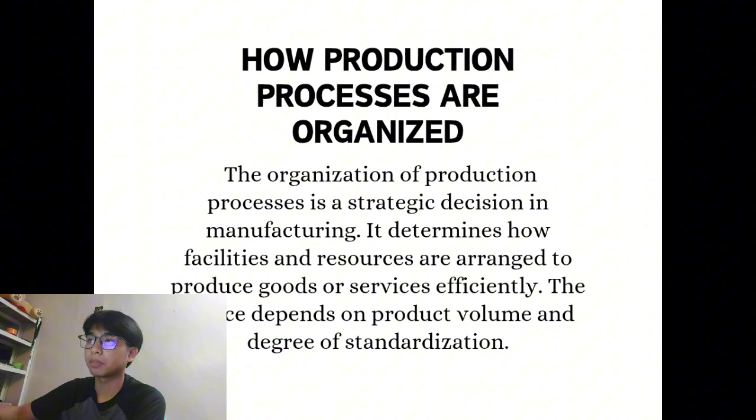Next, there are 5 major types of production layouts, each suited for different situations: project layout, work center, manufacturing cell, assembly line, and continuous processes. These can all be compared using the product process matrix, which links product type to the best production method.

First is the project layout. In a project layout, the product stays in one fixed location and the resources - workers, equipment, and tools - are brought to the site.

Think of it like building a house. The house itself doesn't move, but the construction workers, electricians, and plumbers all go to that location to do their part - all the employees go to that specific site to do the work they need to do.

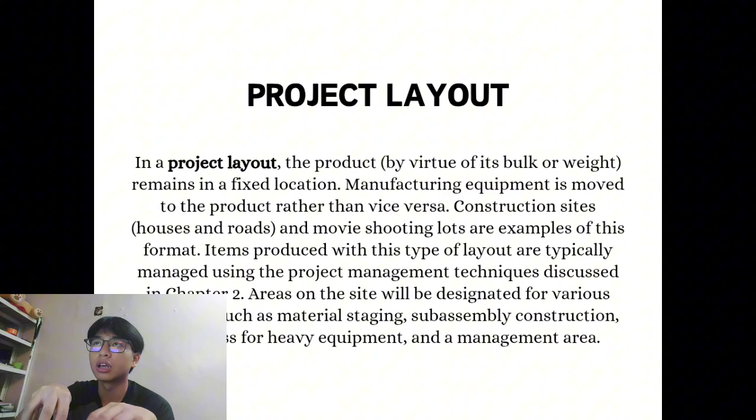Another example is road construction or movie filming on set, where the equipment and staff gather around the project site. As I mentioned, there's one specific fixed location that can't move, and all the employees go there.

In simple terms, products are often large, bulky, or unique, requiring project management techniques to coordinate tasks. Layout areas are planned for materials, workers, and equipment access. This is best for one-of-a-kind products with low volume but high complexity.

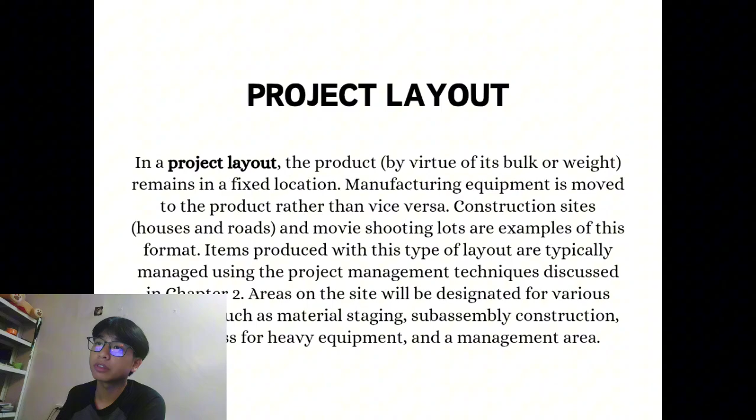Next is the work center. In a work center, similar machines or functions are grouped together. For example, all drilling machines might be in one area, all stamping machines in another. Products move from one area to the next depending on what operations are needed.

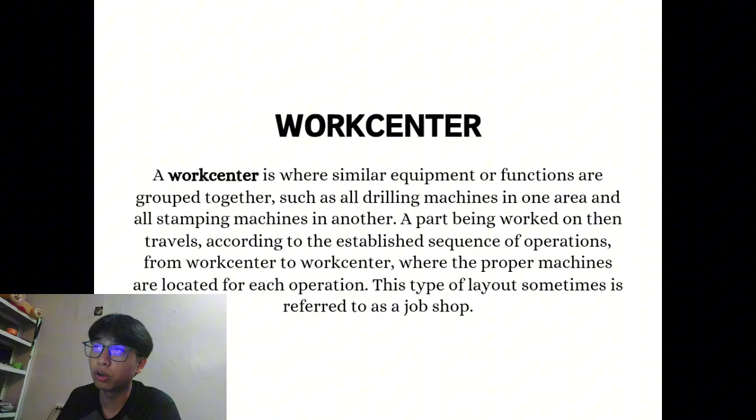Examples include a machine shop making custom metal parts, or furniture workshops making different designs for each customer. In simple terms, this is very flexible since products can follow different paths, but has low efficiency compared to assembly lines because scheduling and material movement can be complex. This is best for customized, low volume production where each product may be different.

Next is the manufacturing cell. A manufacturing cell is a dedicated area arranged to produce products that share similar processing requirements. Machines are grouped together for a particular family of products. For example, an electronic company may set up one cell for producing circuit boards and another cell for assembling power supplies.

Cells are flexible but still more efficient than job shops, and can respond quickly to customer demand. Products move through the cell in a smoother flow. This is best for medium volume, moderately standardized products.

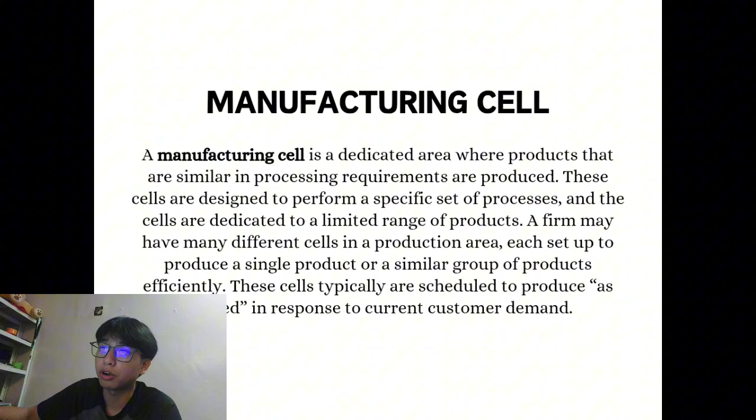Next is the assembly line. An assembly line arranges work in a fixed sequence of tasks, usually in a straight path. Each workstation performs a small specific task and the product moves step by step until it's finished. Examples include automobile factories, toy assembly, and household appliances.

This is designed for high efficiency, producing large volumes of identical or standardized products, with very little flexibility. If the product design changes, the line often must be restructured.

This is best for high volume standardized products where efficiency is critical.

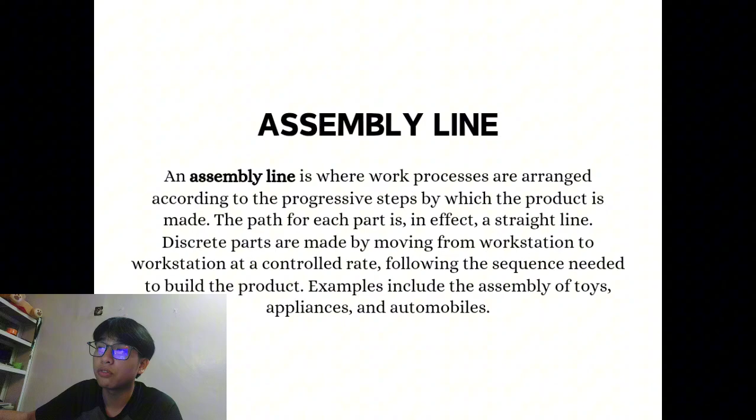Next is the continuous process. The continuous process is like an assembly line, but the flow never stops. Instead of moving items in steps, the production is constant and non-stop. Examples are petroleum refining, chemical production, food processing, soft drinks, and lastly, drug manufacturing.

These are usually highly automated, running 24 hours a day to avoid shutdowns since stopping and restarting can be very expensive. They produce large volumes of uniform products with little variation. So this is best for extremely high volume, standardized products that require continuous operation.

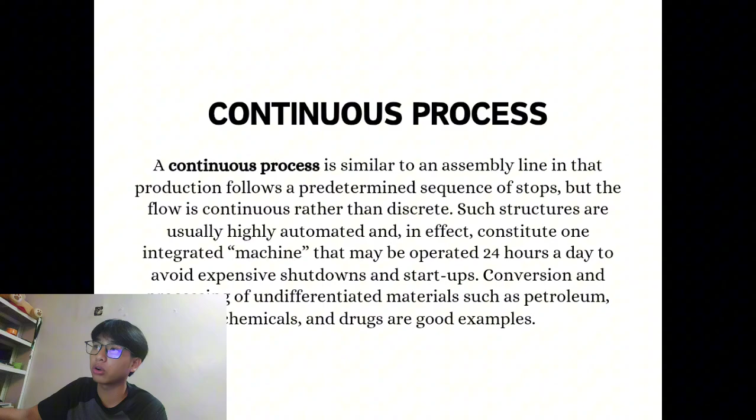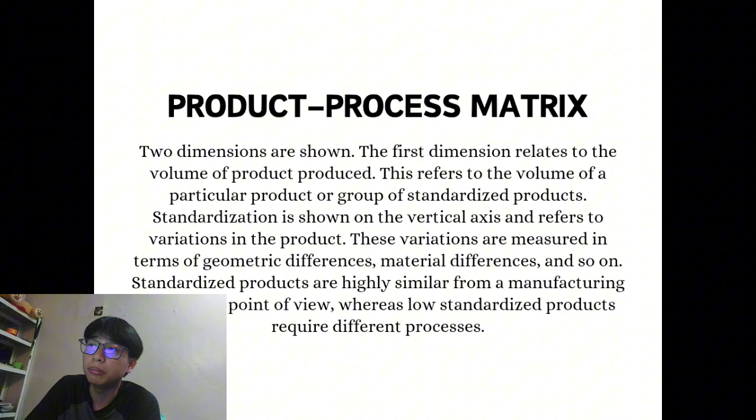Next, let's discuss the product process matrix. This matrix links product volume and product standardization to the appropriate process type. On one axis is standardization, meaning low is unique and high is identical. On the other axis is volume, low meaning small quantity and high meaning mass production.

This means a customized wedding dress should not be made on an assembly line. It fits best in a job shop or project layout. Anything that is customized should not be on an assembly line; it best fits in a job shop or a project layout.

A soda factory should not use a job shop. It needs a continuous process for efficiency, since it's unlimited and continuous, as I said earlier. And of course, because it's soda, we really need a lot of it non-stop.

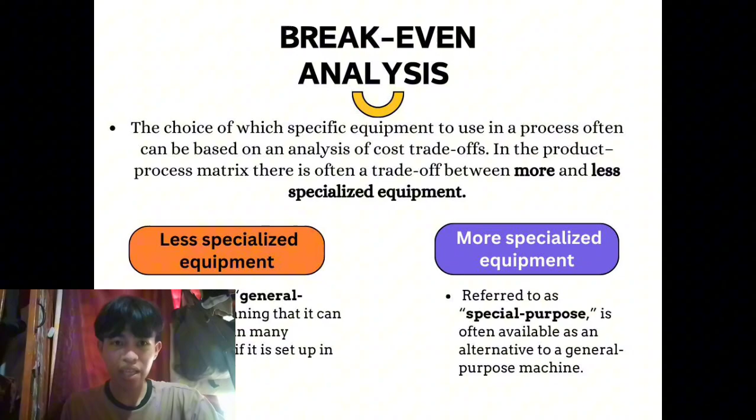General purpose equipment can do many different things. That machine is not limited to only one task, but can do many different things. This is why it is very common in many businesses because of its low purchasing cost and it is very quick to set up. However, the time it takes to produce finished goods is more than with special purpose equipment. An example of general purpose equipment is the hand drill.

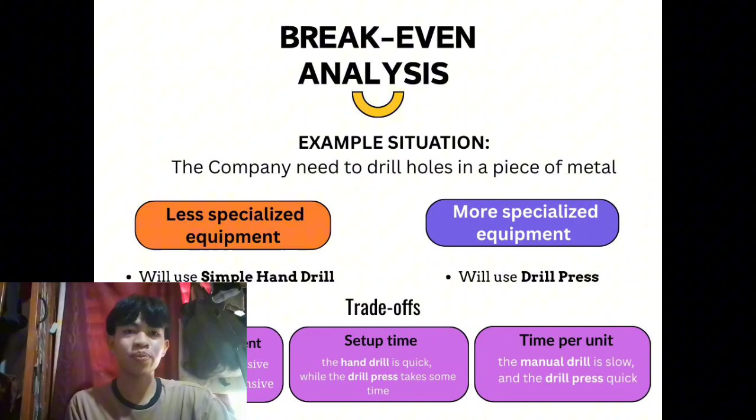Special purpose equipment, on the other hand, only focuses on one thing. It focuses on a specific kind of task. However, it is very expensive and takes longer to set up. But it is much better than the general purpose one because it can produce a finished product much faster. An example of this is the drill press.

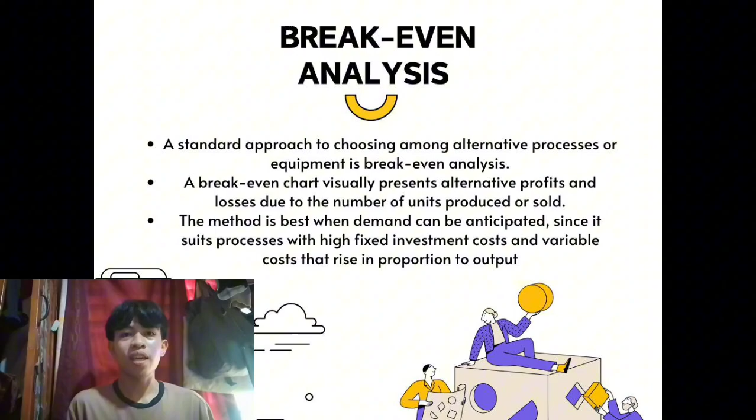So in break-even analysis, it helps us determine which is the better decision in a financial sense. If our demand is low, break-even analysis tells us to use the general purpose equipment. And if our demand is high, then it is better for us to use the special purpose equipment.

Break-even analysis. Suppose a manufacturer has identified the following options for obtaining a machined part: it can buy the part at $200 per unit including materials, or make it on a numerically controlled semi-automatic lathe at $75 per unit including materials, or make it on a machining center at $15 per unit including materials. There is negligible fixed cost if the item is purchased. The semi-automatic lathe costs $80,000 to purchase, and a machining center costs around $200,000.

To get the purchase cost of the $200 per unit, we need to multiply it by the demand. For example, our demand in this example would be 1,000. So 200, which is the per unit cost, times 1,000, which is the demand. If we multiply them, it would be around 200,000. So this is the purchase cost for the $200 per unit.

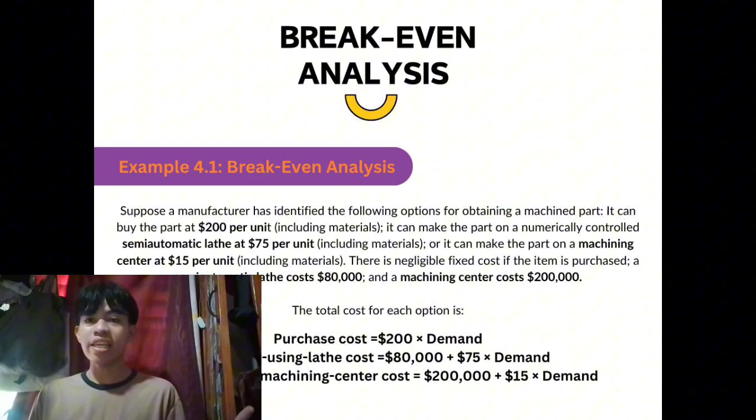To get the produce-using-machining-center cost, we need to add the fixed cost, which is around 200,000, to the $15 per unit times 1,000, which is our demand. So 15 times 1,000 is around 15,000. If we add the cost of the machining center, which is around 200,000, plus 15,000, that equals 215,000. That's how you get the produce-using-machining-center cost. You need to multiply 15 and the demand and add the fixed cost.

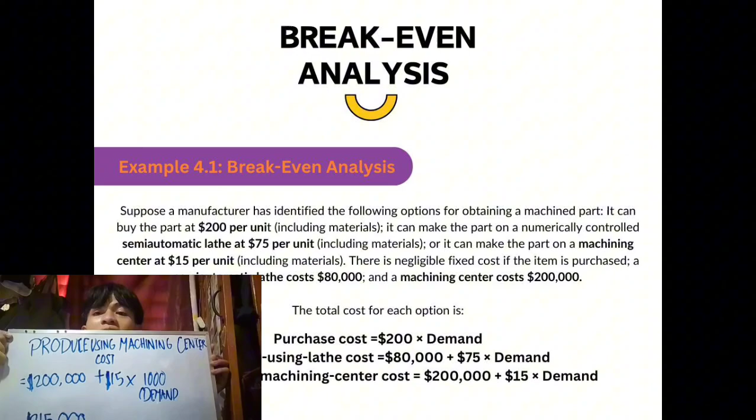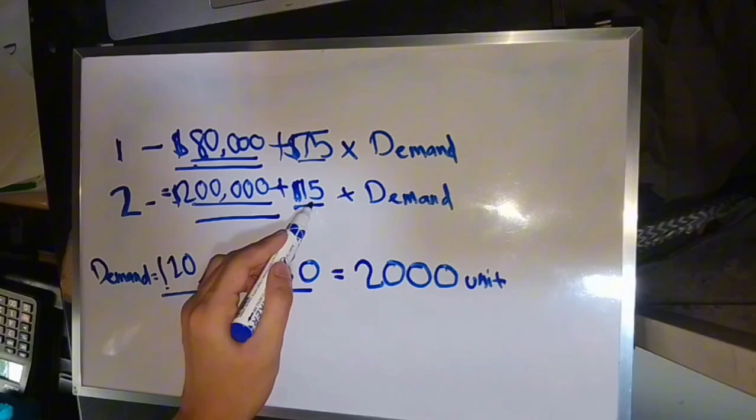To get the formula for the break-even point between producing using the lathe and producing using the machining center, we need to input the formulas for both. First is producing using the lathe: 80,000 is the fixed cost plus $75 per unit times demand. Next is producing using the machining center: 200,000 is the fixed cost plus $15 per unit times demand. So the formula is that demand equals 200,000 minus 80,000, which is 120,000. Then we subtract 75 minus 15, which is 60. So 120,000 divided by 60 equals 2,000 units.

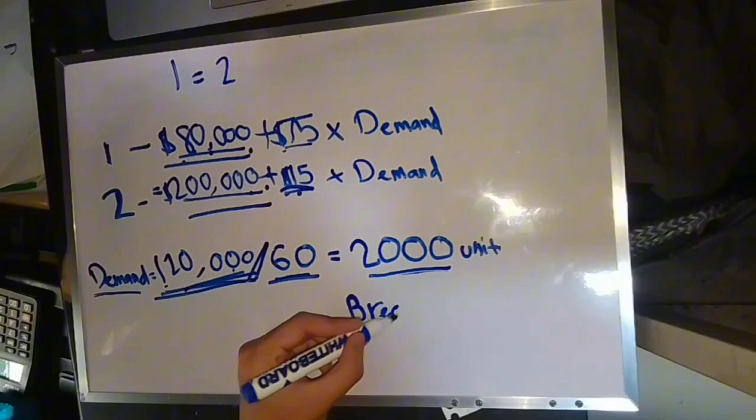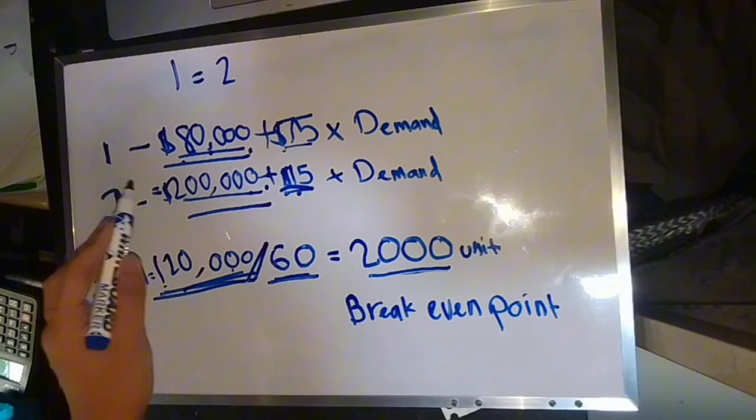So that means you need around 2,000 units for option 1 and option 2 to be equal. That's their break-even point. So that's how you get the break-even point of producing using the lathe and producing using the machining center.

To get the break-even point of the purchase cost and the producing-using-lathe cost, you need to input the formula here and the formula here. Then you subtract the fixed cost of producing using the lathe and the fixed cost of the purchase option. Since it doesn't have any fixed cost, it should maintain as 80,000. After that, you subtract 200 minus 75, which is 125. So 80,000 divided by 125 equals 640 units. So the break-even point of the purchase cost and the producing-using-lathe cost is 640.

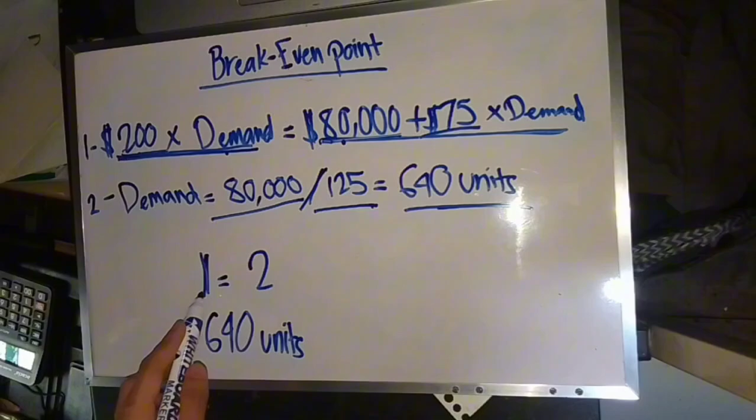So you need 640 units on both sides to be equal.

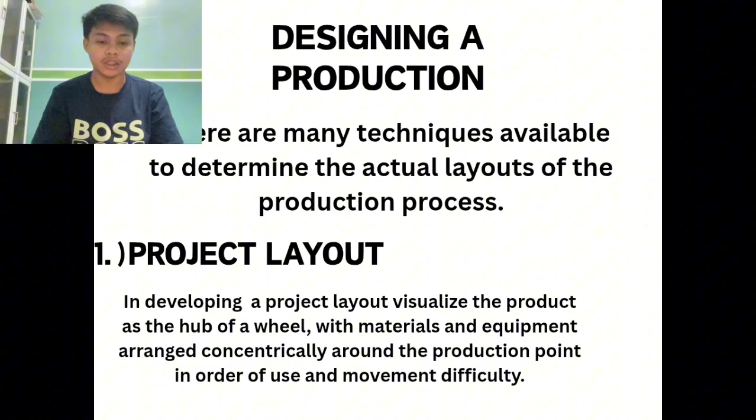Designing a production. There are many techniques available to determine the actual layouts of the production process. First, project layout. In developing a project layout, visualize the product as the hub of a wheel, with materials and equipment arranged concentrically around the production point in order of use and movement difficulty.

Second, work centers. The most common approach to developing this type of layout is to arrange work centers in a way that optimizes the movement of material.

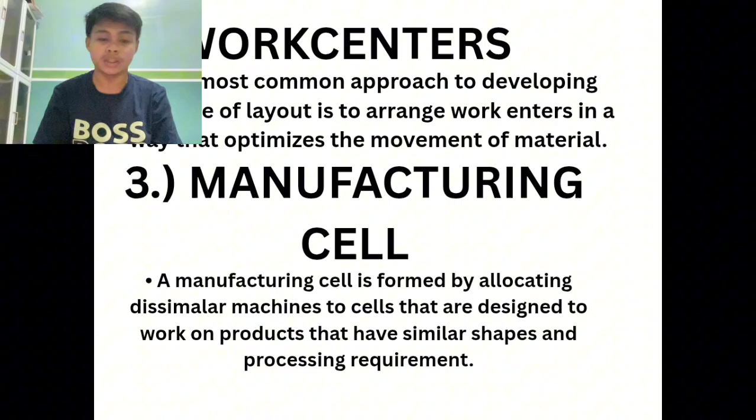Number 3, manufacturing cell. A manufacturing cell is formed by allocating dissimilar machines to cells that are designed to work on products that have similar shapes and processing requirements.

Good day everyone. Today I will be discussing one of the most important topics in manufacturing process, and these are assembly line layout and continuous process layout. Before I start defining and differentiating these two types, let me share the importance of this.

This topic is important because the layout of a manufacturing process determines efficiency, cost, and quality of the production. A well-designed layout allows companies to produce goods faster, reduce waste, and lower expenses while still meeting the demand of a growing customer base. In fact, it is believed that layout is considered the backbone of the production system.

To make this easier to imagine, think about our everyday situations. If all our classmates work together on a group project at the same time but there are no divisions of tasks, right? It's chaotic, it's slow. But if there are roles—one for research, one for editing, one for presentation—the task gets finished faster. That is exactly how an assembly line works: step by step and organized.

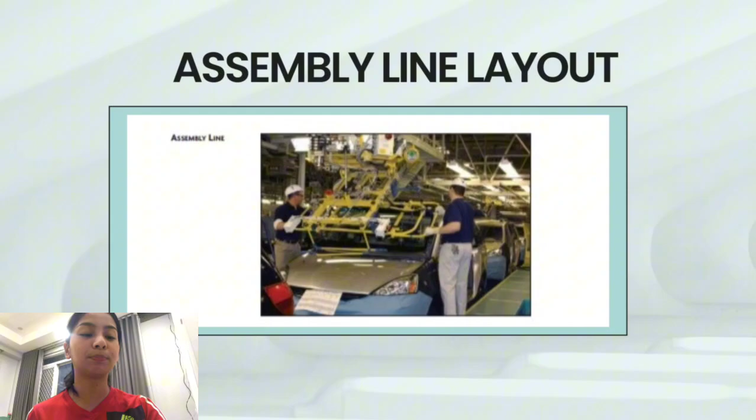A key element of assembly lines is pacing. Remember this word, pacing. This regulates the time allowed at each station to keep production smooth and consistent. Because of this efficiency, assembly line layouts are widely used by manufacturing firms across the world.

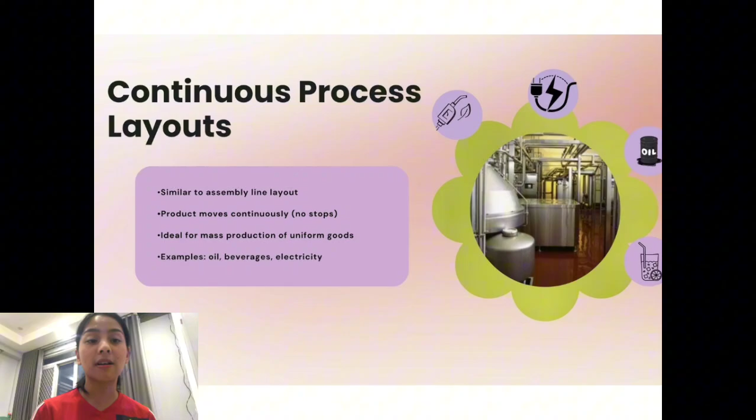The most common example I could give you is car manufacturing. One station installs the engine, another adds the doors, the next installs the wheels, and finally the car is painted and inspected. The product moves step by step until the product is complete and turns into finished goods.

Another example I could give you is like a burger—it needs to be made step by step: bun, patty, vegetable, bun, something like that. That's the idea of assembly. From the word itself, assembly, meaning we assemble it.

Let's move on to continuous or flow process layout. A continuous process layout is similar to the assembly line, but with one important difference: the product moves continuously without stopping at stations. This makes it perfect for industries that need 24/7 production of uniform goods.

An example I could give you is oil refineries, power plants—our electricity. It's like only the machine is running, and it needs to operate 24/7. Soft drink factories, the making of liquids—that's the purpose of continuous process layout.

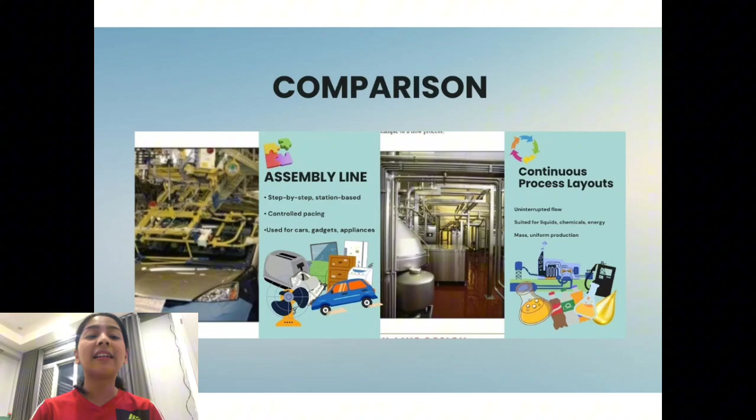In conclusion, both assembly line layout and continuous process layout play a very important role in modern manufacturing. Why? Because assembly lines are best for production that requires multiple steps of assembly, such as making cars, gadgets, and appliances. Continuous process, meanwhile, is suited for uniform products that must be produced non-stop, such as oil, beverages, and electricity. These two systems have revolutionized how industries produce goods, making them faster, more cost-efficient, and more reliable.